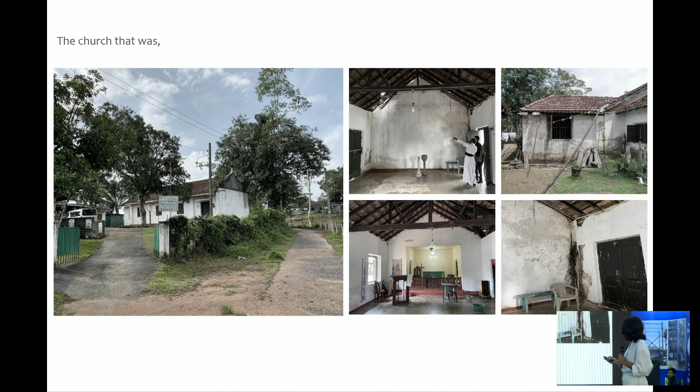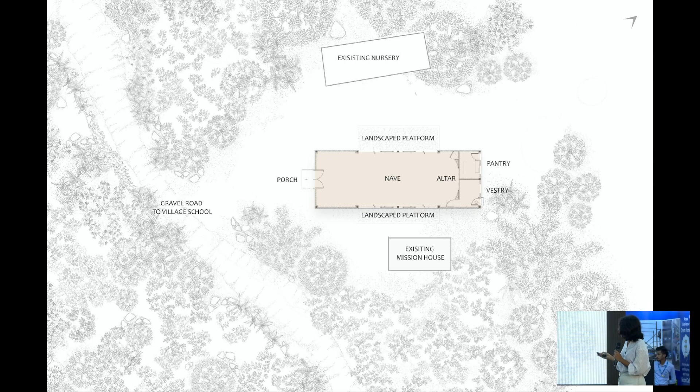The nave in the middle overlooks two landscape platforms, which has cross ventilation in the middle, and has an existing nursery and an existing mission house. None of the trees and vegetation were cut down; it was maintained as it was.

A simple gable structure was designed with steel web and exposed bricks, along with colored asbestos roofing sheets. Basically, in church architecture, we see a central volume being very high, but in this case we tried to lower the roof to a human scale so that it resembles the humble origin of the villagers and gives some sort of village character. That's why the roofs were brought down to a human scale.

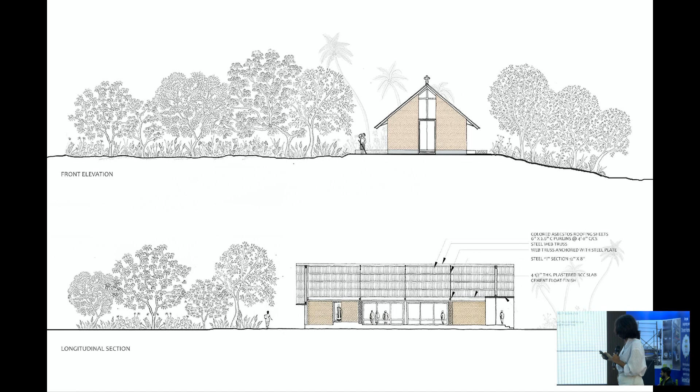This is a view towards the church. You can see the central openings open outwards towards the greenery, called lily Irish flowers, which are yellow flowers to bring liveliness into the church. Cement grills on top allow for cross ventilation to let the hot air out.

As you can see, the floor is cut cement, specifically Puttalam cut cement, to resemble a moss green effect; it has been cut and polished. On the right side, you see a mission house, which is the residence of the parish priest.

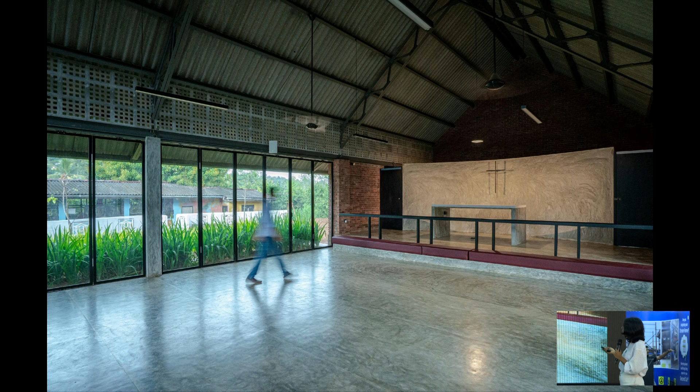This is towards the altar, which a person walks towards; it's made of saffron pigmented cut cement. Behind it, on the left side, is a kitchen, and on the right side is a vestry. Basically, in church architecture, you don't usually get a kitchen as a main space.

But in this case, we had to have a kitchen because the villagers will be coming from a far distance. So to serve them tea or meals, a kitchen was requested. So that's an important part of this design.

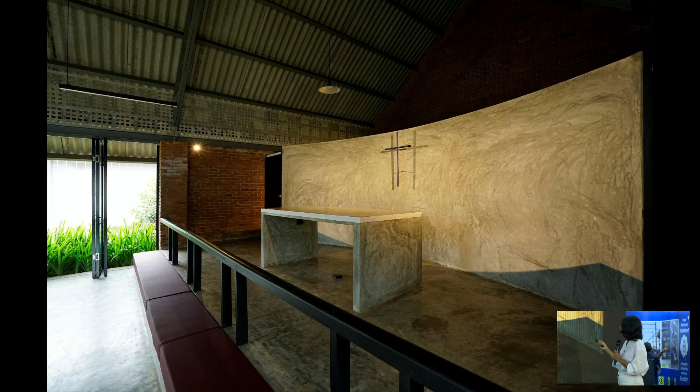And on the left side, we have a nursery that caters to village children irrespective of religion. And this is the altar detail. It's saffron pigmented cement, cement float finish, and a steel rod has been used for the cross. The altar was out of concrete, and titanium cut cement has been used.

At the rear, you can see a built-in seat has been used, because there are elders who will be coming in for them to sit, and the rest of the space in the middle is for the general public to be seated on the ground. Because this is a village character, majority of them would like to sit on the ground in a church, so that's how it is being designed.

This is the side elevation of the church. You can see the lush greenery coming from the Irish blue lilies flowers, the two solid walls, and the glass partition in the middle. The roof has been lowered down to human scale to depict this church. So basically, it's a low-cost church in terms of materiality, with local material used for that purpose.

Thereby, it becomes a less maintained, low-cost church.

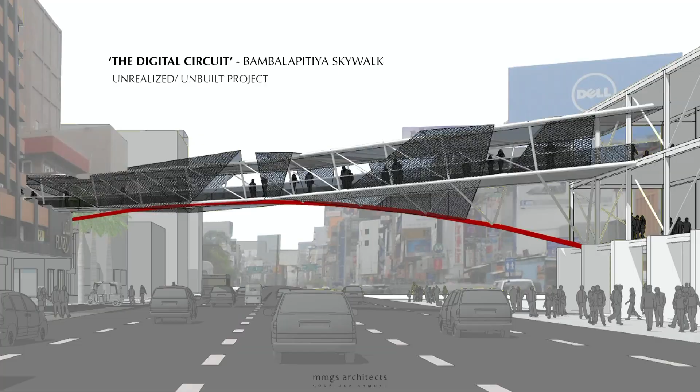My name is Himaya, and I'm going to be presenting the digital circuit, Bambalapitiya Skywalk. Also known as the Bambalapitiya Skywalk, it's an unbuilt proposal for an overhead pedestrian bridge at the Bambalapitiya Junction. This project is roughly 1,200 square meters and is a winning entry of a design competition held by SLIA in association with the UDA and the CMC under the Metro Colombo Urban Development Project.

It was funded by the World Bank. The Skywalk also received an honorable mention at the SLIA Design Awards 2023 under the category of unrealized and unbuilt projects.

The bridge connects the Bambalapitiya railway station, the Majestic City, Unity Plaza, and the Bambalapitiya public market. The railway station and the public market were set to be demolished and rebuilt with international standards, and its primary purpose was to reduce traffic congestion for a safe and easy pedestrian commute.

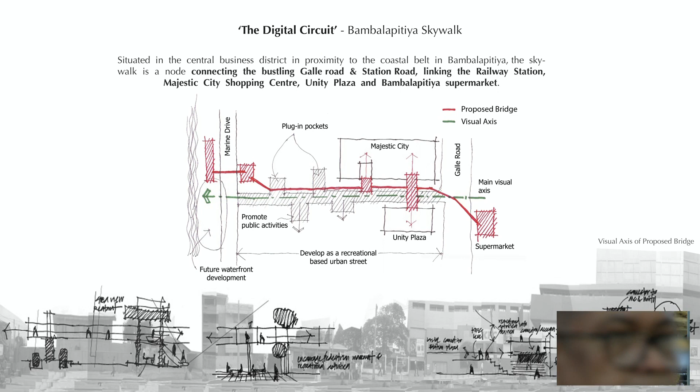So from the schematic sections, you can see how the visual axis is shown at different nodes of the bridges.

Coming to the design concept, the Skywalk was initially inspired by an electronic circuit board to portray a distinct character of technology and youthfulness.

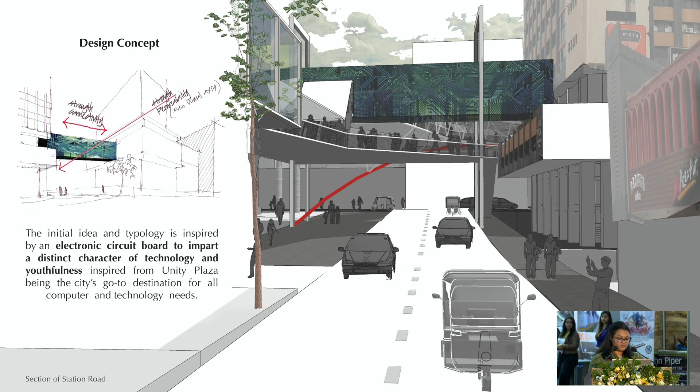The digital circuit board concept was influenced by Unity Plaza, which is famous for tech goods around the Colombo city area. The experience of walking through a digital circuit is captured by the use of various tech-inspired artwork and lighting effects, as you can see from the varying transparencies of the bridge throughout.

Coming to the linkage to the Bambalapitiya railway station, the pedestrian bridge has a connection to it, being a crucial point for daily commuters. This linkage brought upon a reconstruction of the railway station with all new modern facilities, to be funded by the Cargill's group with a request of having a rooftop to conduct their business activities.

The superstructure was to be made of concrete and structural steel with skins to create a variety of the feel of the bridge at nodes, making it a very practical bridge despite its curious appearance. The swellings at the nodes are inspired by intersection points on a circuit board.

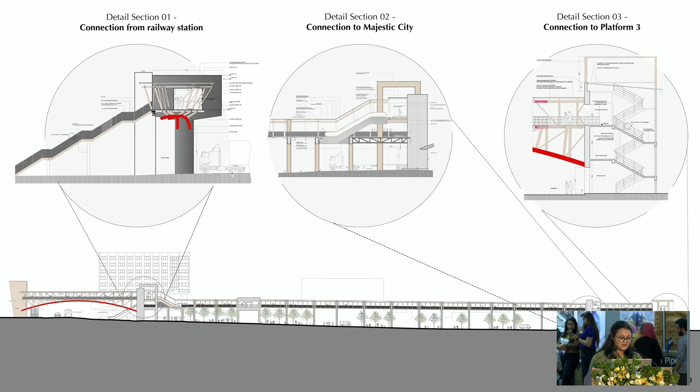It creates hangout spaces with LED screens, eateries, and other recreational activities. In contribution to social responsiveness, there are various layers that serve the youth generation, mixed retail-oriented users, and the general commuters along both the Galle Road and the Station Road.

The connection to the Galle Road mainly had a steel structure with checkered plate flooring and woven mesh coverings with fiber roofings. This is the most iconic sector, with the steel arch being the main element that is painted in red.

Moving on to its structural components, specifically the lighting, the naturally diffused light is brought in through the overhead steel mesh, clear glass, and solar panels. The artificial lighting brings a sense of liveliness and a varying appearance to the users of the bridge at night.

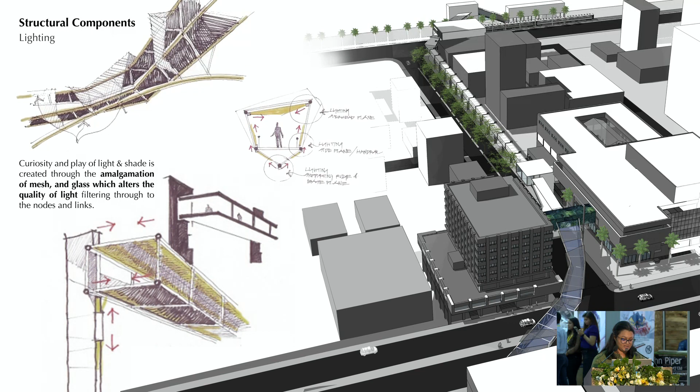And the main glass facade connecting the Majestic City shopping mall and the Unity Plaza has a green tint with a stencil cutout replication of the linear element of a circuit board.

Moving on to how the bridge would be environmentally sustainable, solar panels are introduced at both ends of the bridge for electricity generation, and it also acts as an architectural element on the roof. The openings above the solar panels and the roof covering tend to release the stagnated hot air.

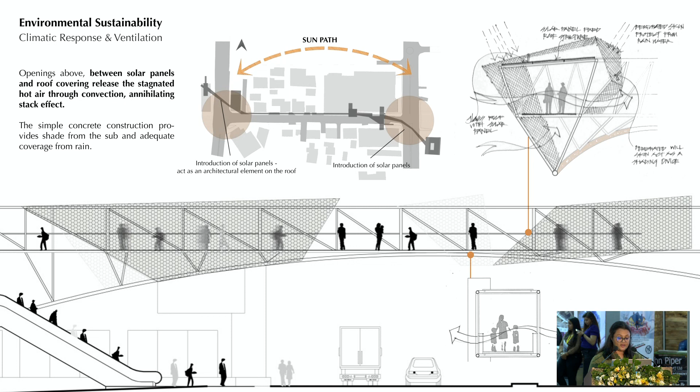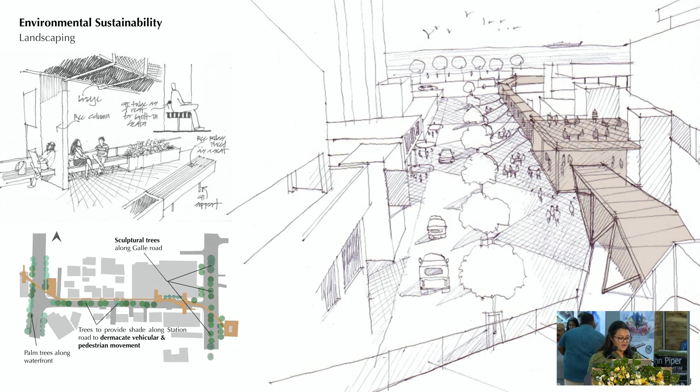In terms of hardscaping, the paving patterns are used along the station road to break the monotony of the bridge and strengthen the activities along the street. The softscaping consists of planting various types of trees in front of the waterfront of Marine Drive, Galle Road, and Station Road to demarcate the vehicular and pedestrian movement.

So wrapping up, let's take a look at a fly-through to the digital circuit Bambalapitiya Skywalk.